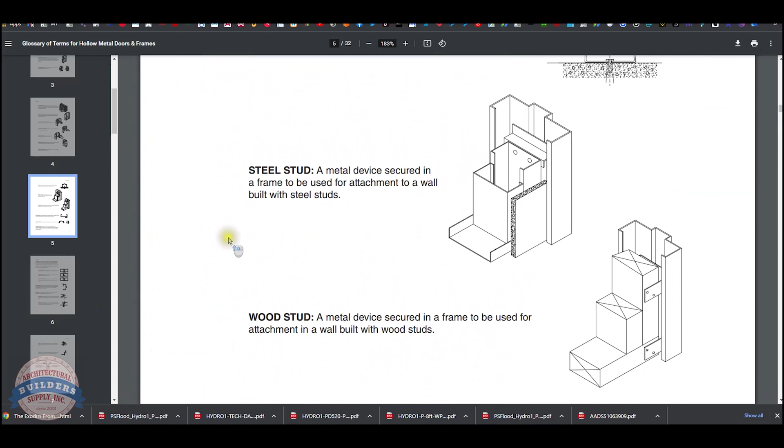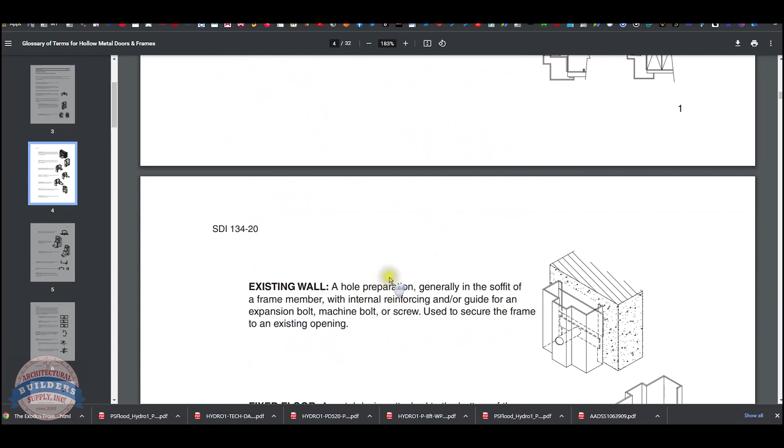Base anchor, sill anchor. Okay, so let's scroll up to anchor. Yeah, they don't have an entry here for base. So I'm thinking we're going to get to sill anchor. Fixed floor anchor. There's a fixed floor anchor or a floor anchor. Mullion anchor. Imagine if this is just one continuous piece. I sure wouldn't want it as 2 individual pieces. To me, that just seems like a lot more work. I'd want it a single piece.

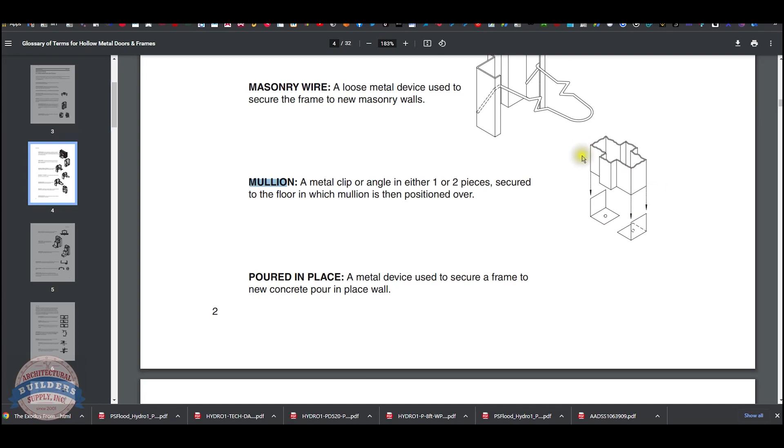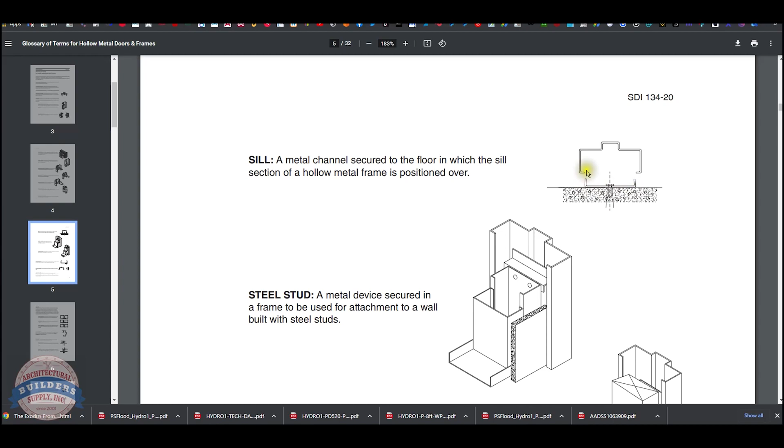In fact, I've not seen every part from every major hollow metal manufacturer, far from it, but I've never seen it as a 2-piece. Or, I would have put squiggly lines here to indicate that it's a single piece and just the jamb depth varies. 1 or 2 pieces. Okay, so a sill anchor, yeah, and they're referring to that here. This would certainly work. The issue is that the anchor in my hand is not a sill anchor in the sense that its overall width does not take into account the returns.

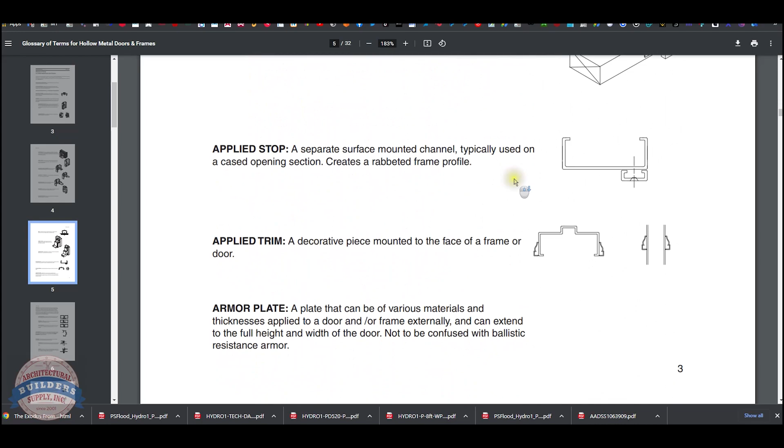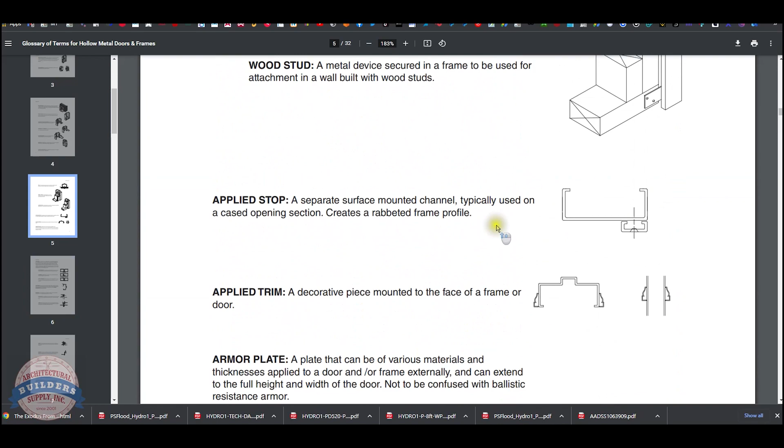So if you were going to mount a sill down to the floor, you'll need something that's made or prepped for the anchor that you're using. But you'll note they don't have an entry for mullion anchor, but that is most absolutely how I would know this as a mullion anchor because it's used for mullions. It's not exactly correct as a sill anchor because you'd have to modify something. You'll figure that out really quick.

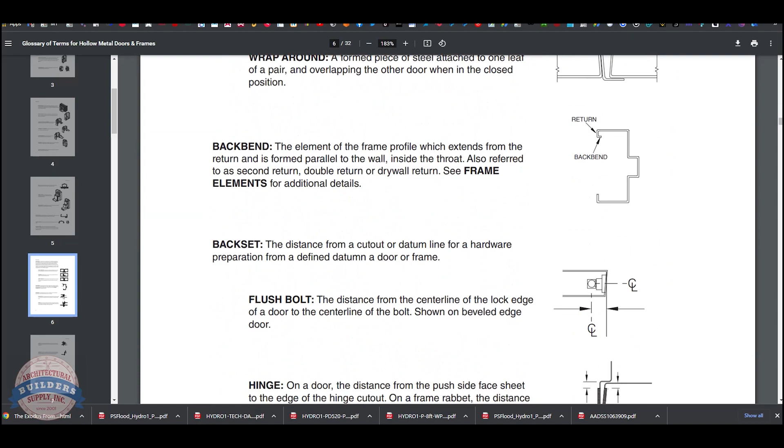Then with this, you don't have any good way of attaching this at all. I might notch the return if possible, so that would fit down over a mullion anchor or this sill anchor as they've drawn. And there you go. Now, what I was basically rambling on about before, in a side light frame like this, it's going to look like that. And that mullion anchor is going to sit right in here. It'll get attached to the floor, and then you'll attach it here and here.

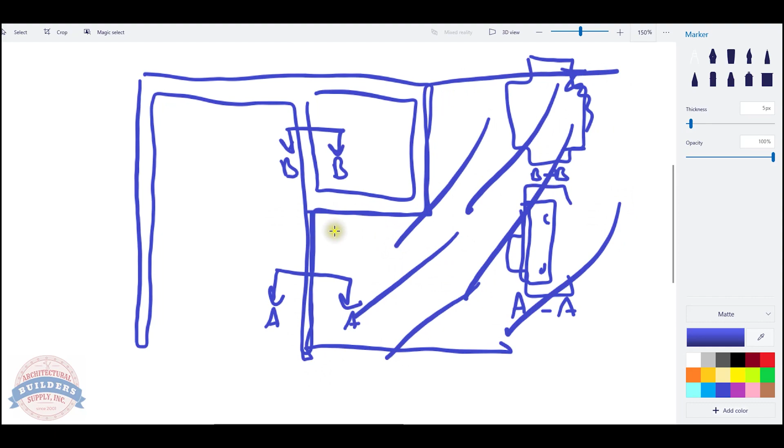Okay. This is a situation where that is not open. So this section here wouldn't exist from here down below, so that all of this could be wall section. This is all wall. Okay, that's your wall, and that's what that's going to look like.

Let's wrap up this video on camera. So hopefully that discusses the base anchor, other ways in which the terminology is applied, and gives you an additional definition that's not in the glossary about what a mullion anchor is. There you go. Let's move on to the next definition.